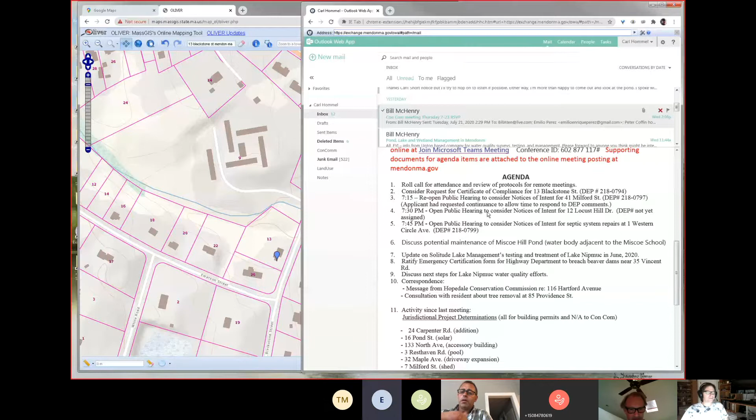7:15. Bill, you ready? So this is the one where Bob Poxon was trying to get his applicants to comment on his revisions, and they still haven't given him an approval. So he's asking to continue.

Let's have somebody make a motion to continue to the next posted meeting. Carl Hummel moves. Is there a second? Peter Coffin seconds. All in favor? Aye, aye, aye.

All right, okay. Now we got some time before our 7:30, so if you want to run down any discussion items. Discuss potential maintenance of Miscoe Hill Pond water body adjacent to the Miscoe School.

Peter, you want to go, Carl, you want to step in? Yes, I'm sharing on the screen the body of water in question. I am a part owner of this pond, so when we come to any decisions about making spending decisions, I would step down and recuse myself from that.

There have been some anonymous complaints over the past month about the water level and the construction work being done on the lake. I have reached out to Solitude Lake Management and also the company in Upton that does water management for estimates about coming out and doing a survey and checking for invasive species, whether the beavers are being too destructive, and any other recommendations they might have as to water quality.

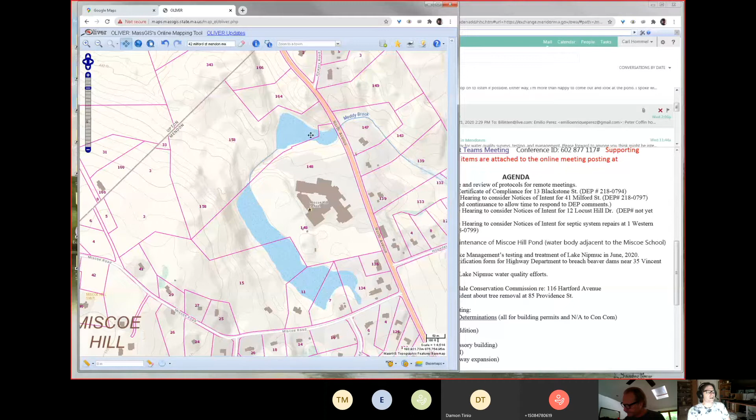I'm blanking on his name. I'll come back to it. John Gannett - the Gannets, right? And they might be interested because any work done on the lake would impact the creek and then the outflow to the second lake that is down below them.

So I would be working with Bill and coming up with an official Conservation Commission letter that would go to all of the interested parties, and then host an evaluation meeting to say whether people want to address invasive species, do mechanical removal like in the pond, or pursue water treatment.

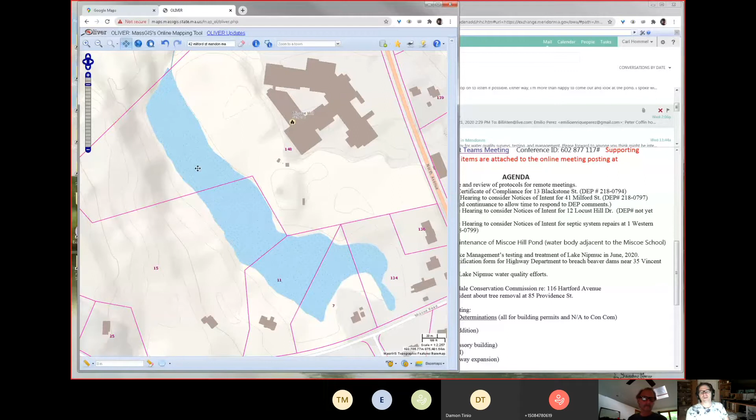One of the concerns that the person at the Upton Company raised is that the football field is right here, and there may be fertilizer and other runoff coming from that which would lead to water quality issues. So they are sensitive to those concerns.

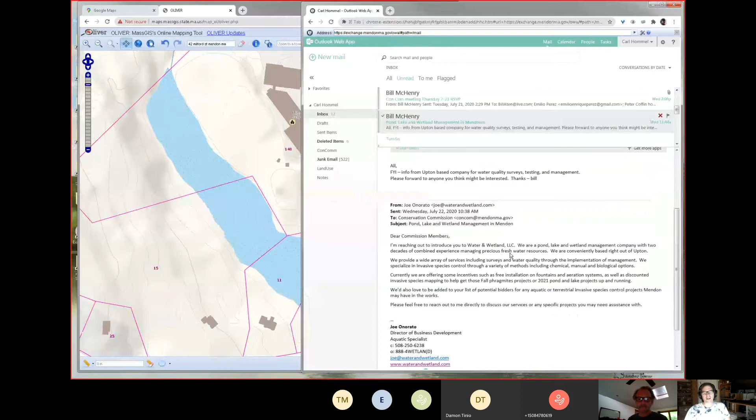They're also interested - they sent a letter to the Conservation Commission earlier this week about water and wetlands, and I'm quite sure they'd be interested in working with me and the committee on this particular plan so they can be considered for any future work on Lake Nipmuc and other lakes the Conservation Commission is responsible for in town. So what I would ask for, after discussion, is a motion to authorize Bill and me to move forward and engage in a free survey, then talk with them and with Solitude about whether we do water quality testing.

Any questions, Damon, Emilio, Peter? I think that sounds great. I'm very... that would be... to get some free advice, I think is huge.

Free is good. And the other thing is then I can go back to Solitude and say, I already had this other company come out. Do you want to lower your price from 750 to something more reasonable, and see whether they're interested in engaging with us on this. Competition is a good thing.

Carl, great job pulling it together. I'll make a motion to pursue steps towards a management plan for the pond in question. Okay, I'll second that. Can you second that, Carl, or you're...

I'm only going to recuse myself when there's money involved. I don't know if that's a... Okay, well, we'll go with that. Would you like me to second it? Okay, I'll stay out of it then. Let me have somebody else just to keep it all clean. You do own property on it. That's probably the best. So Emilio is second. Emilio Perez will second.

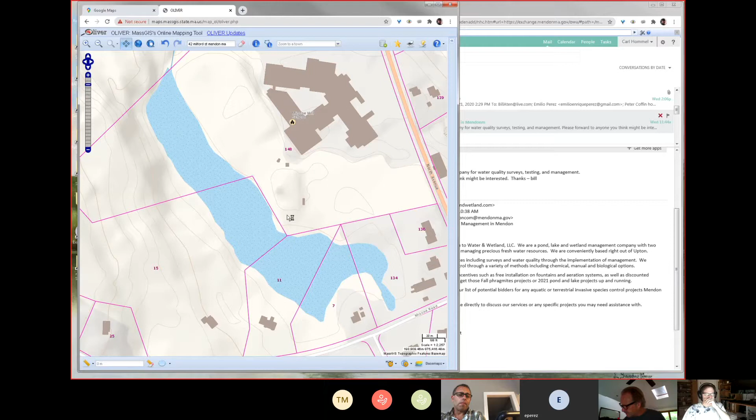I'll give you one quick one while you're looking. Can we just get an okay for the Grandview Entertainment license routing slip? Yeah, I have no issues there as far as anything going on with that. Okay, everybody else okay with that?

Which agenda item is that? It's not, it just came in, the routing slip just came across. Okay, I have no problem with it. It looks like they're asking for permission for a big tent, and I would think they would need outdoor space, with COVID-19 for sure. Okay, great, no objections. So, sign that bill and you can get it off to them.

So, update on Solitude Lake Management's testing and treatment of Lake Nipmuc in June. I think I can't remember where we left this, but I think everybody knows now. They came in, they did the copper sulfate treatment for the algae and some of the more routine treatment that they've done. And they're going to come back after they've done some lab tests and see if the algae springs back or whether this was effective enough for a while.

I've been on the lake quite a bit the last couple of weeks, and it has seemed to help tremendously. Oh, good. Everybody that lives on the lake has agreed, and you can actually see some of the stuff that was growing rapidly in the spring is already dying off. So I think we're in good shape on that end of it. Thank you, but yeah, obviously we'd like to hear from Solitude on their expertise about it.

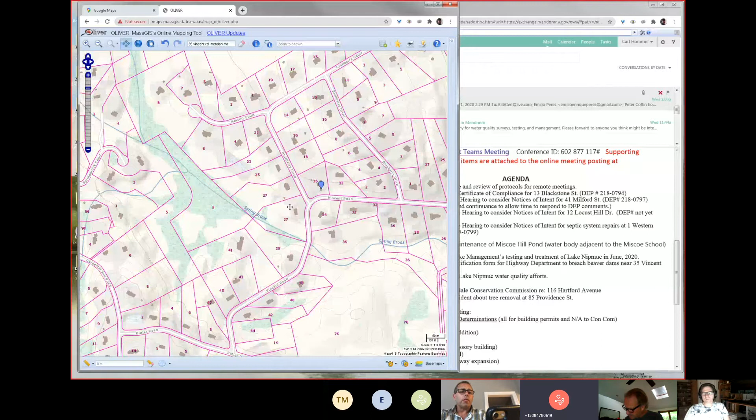Okay, next steps for Lake Nipmuc water quality efforts, Bill? That's just ongoing, leaving it on the agenda. At some point, if we could... actually, this new company might be able to give us a little help there too.

Go ahead, Carl. We just heard the copper sulfate treatments were having a positive effect on the look of the lake. Is there a water quality problem? Well, we still don't know why there's a spike in E. coli at certain test locations, like right near the beach, not in front of the beach, and right near the yacht club, but not everywhere else.

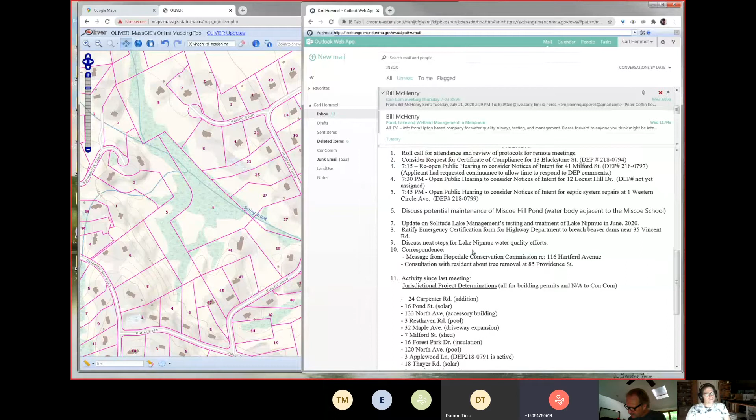Has that been happening this year, or was that just last year? I don't know because I haven't heard of any testing. I do believe that Susan Thomas has done some testing for the Nipmuc Association, and it's coming back to me, I think you're right, one event it was higher in a place she wasn't assuming it. So there's been some, but that's a non-certified lab, and the Board of Health will not entertain that information. I think it's useful as a screening, but the Board of Health only tests at the beach.

So maybe if there's an issue, someone's got to pay for a certified lab to do the testing just anywhere else other than the beach. I think the Board of Health ran some tests at several locations, but I can't remember exactly where they do it. But it's not just in front of the beach.

No, they do some over in the cove, like where the outlet is, by Nipmuc Marine, they check the outlet flow there that comes out of the catch basins on 16. And they have done some down in the other cove past Alicante in the past. But the water level on the lake is high right now, even though we're in somewhat of a drought situation. It seems the water level is holding pretty well, whether it's beaver dams on the outlet, I'm not sure, but at this point the beaver dams could be helping the lake rather than hurting it right now.

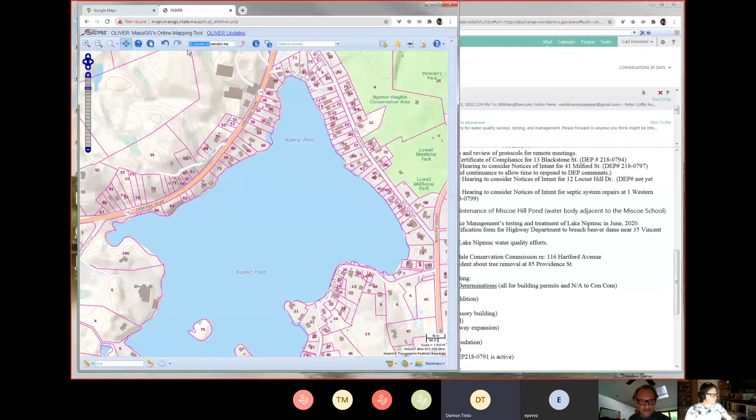All right, we got 7:30 here. We want to move to our first hearing. So we can open the public hearing to consider notice of intent for 12 Locust Hill Drive, DEP number not yet assigned.

Fred, is that yours? So yeah, Fred is here to present that one. If we finish up tonight, Fred, we'll just have to wait for the file number. But anyway, go ahead, I think the floor is yours. Okay.

You need your plans? You got a plan for this, Fred? Yeah, it should be accessible to you, Bill, right? Yeah, either Carl or I will. Here, Carl's on it, I think. It's also on the PDF that was sent out on the email. That's correct, the notice of intent, that's what I'm opening up. Yep, thank you, Carl.

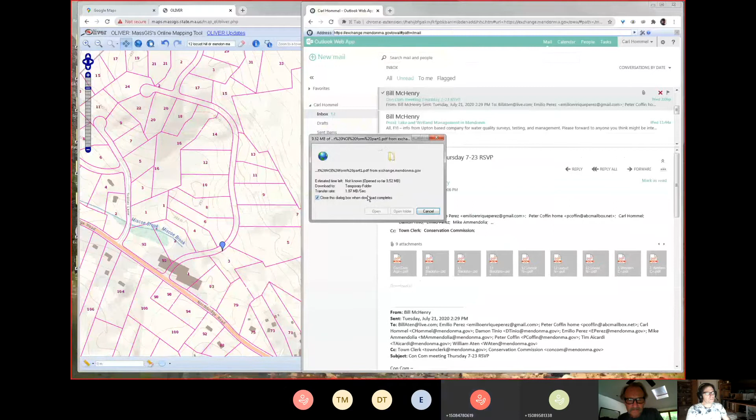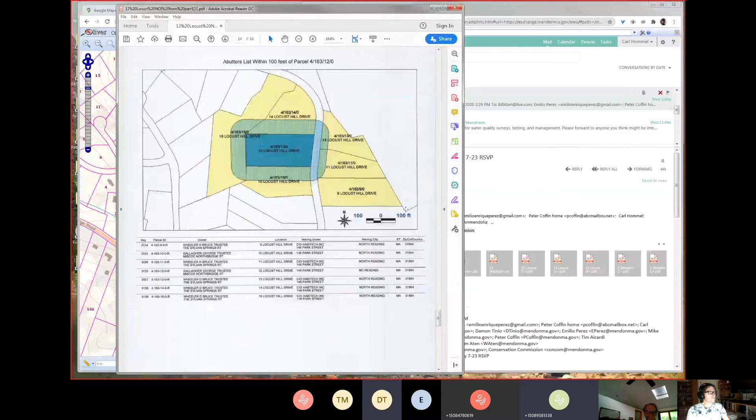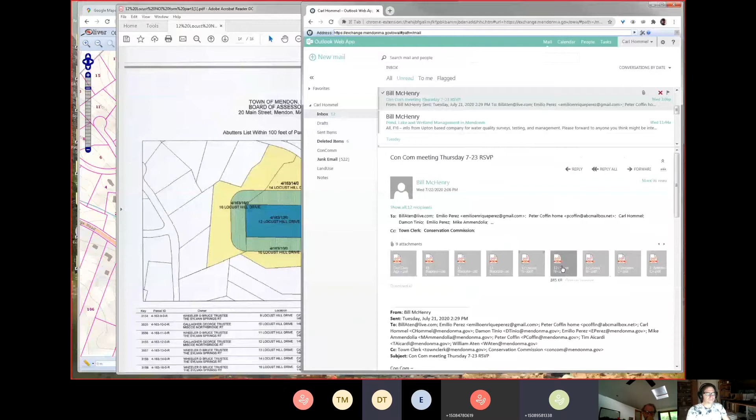Okay, Sheet 1 of that plan is where will be the most helpful. Sheet 1 shows the entire lot. This is a new construction request that we're making. It's a lot that has a lot going on. It's wrapped with drainage facilities for the subdivision. And we have here about a third of the lot, going back about a third from Locust Hill Drive, is where this notice of intent would apply. The rest is under a separate notice, separate order of conditions for the infrastructure for Miscoe Springs development.

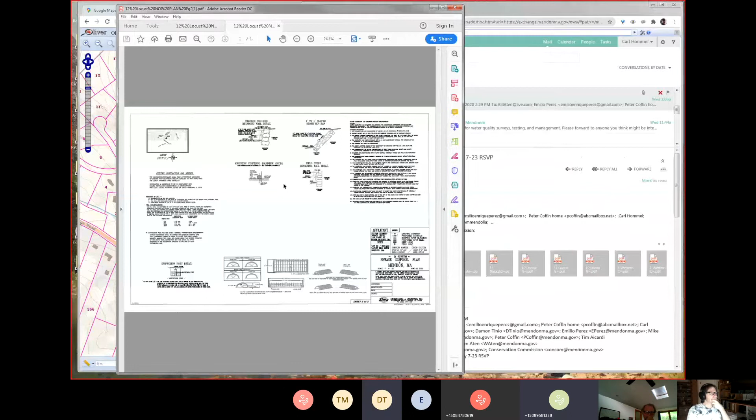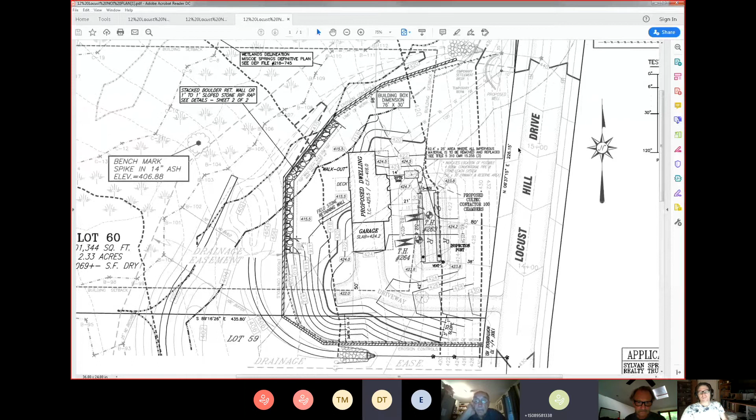So we have about a third of the lot here that's a hillside lot. What you're looking at is Locust Hill Drive, elevated quite a bit above the wetland that goes through the middle of the lot. And prior to that wetland, we have water quality swales, a sediment forebay, and the detention basin that serves most of this section of the development.

So the work area, you can see it's like a horseshoe shape where the house is located, the driveway, the septic, the well, and everything else is pretty much soft grading except for a boulder retaining wall right behind the house. We have about 110 feet or so of retaining wall that will allow this house to have a modest backyard. It's about 50 feet from the house to that wall.

So there's two lines of defense here for the wetlands. One is the infrastructure that is in place, that would be the water quality swales outside of this activity that we're getting permitted tonight. Those swales and detention basins are constructed and operating. On the uphill side of that infrastructure, we're going to wrap this building site with erosion controls in the form of straw wattles and siltation fence. And the permanent erosion control certainly would be the boulder retaining wall behind the house. Everything else is soft grading and would be handled by vegetative cover.

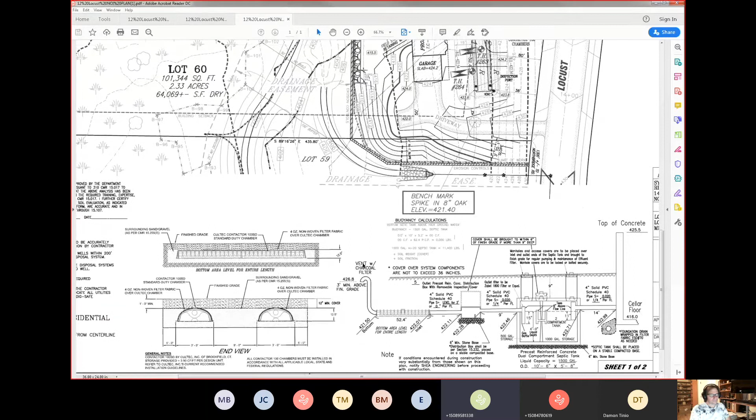Yes, and this will have to be hands-on as far as getting that grass established, or whatever shrubbery they want to put in there. But there is great protection of the wetland in the form of, when you get beyond this slope, there's a water quality swale. You can see the curvilinear shape coming over into a forebay. That is protection for the wetlands, and then you have the detention basin itself. So we have the swale, the forebay, and detention basin, and then the water goes into the wetlands. So whatever happens here, if there are deposits that make their way to the bottom of the slope, there'll be ample opportunity to clean that up and get it out of the drainage easement.

So, Peter, is there something you want to have written up differently in the order of conditions for this lot? I guess if Fred's okay with it, or the client, I would recommend drought-resistant grass and a higher quality seed, and maybe planting of perennials to reinforce that bank would be a good idea.

You mean something other than grasses? Something other than builder's rye? Yeah. Oh yes, yes. You could put a wildflower seed mix in there, but drought resistant is what that slope really needs. No, I'm looking for dense, thick growth. The owner might think otherwise, so I'm not here to tell you aesthetically what to do, but I would want a higher grade level for the planting plan.

So what could you recommend? Is there a way of saying what sort of seed, or was my language sufficient? Fred? Well, I wouldn't go any further than just making sure we get the drought resistant grasses. Yeah, and it's really going to be how well it takes. So it needs watering for sure. This is going to be an area where there's going to be some man hours put in here to keep that slope in place until the vegetation is established.

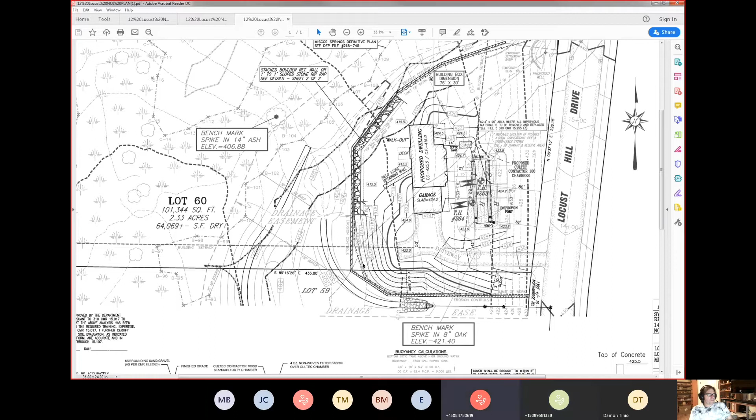I got a question for you, Fred. This whole lot, this one-third to the front, it's all going to get cleared out totally. So tell me, where are you going to put the loam that you're scraping off? It seems to me the only spot not getting altered is near the building box dimension and the 420 - everything else is going to be worked on. So how are you going to work at that?

Oh yes, a subdivision like this is staged throughout at different locations. They'll have a staging area for loam production. This will be stripped and stockpiled. There are staging areas for rock preparation and for different products that the contractor makes.

And they've done a good job throughout this subdivision so far of making sure these staging operations take care of the water. You guys have heard of Gentis Corporation, I'm sure. They're very good at handling the runoff from a site that's opened up and under construction, and it's been a pleasure working with them because they really do pay attention to what's happening.

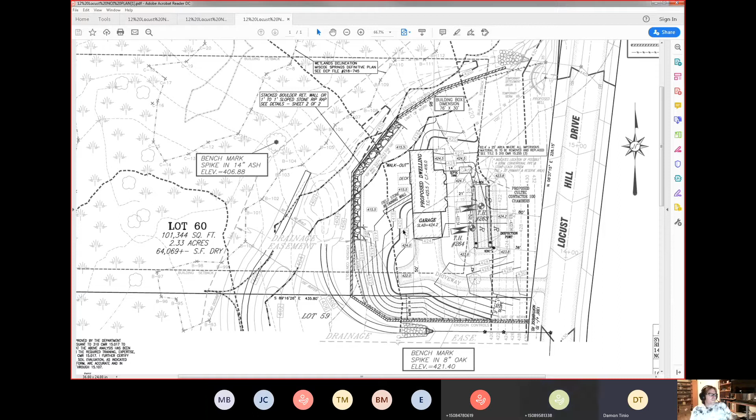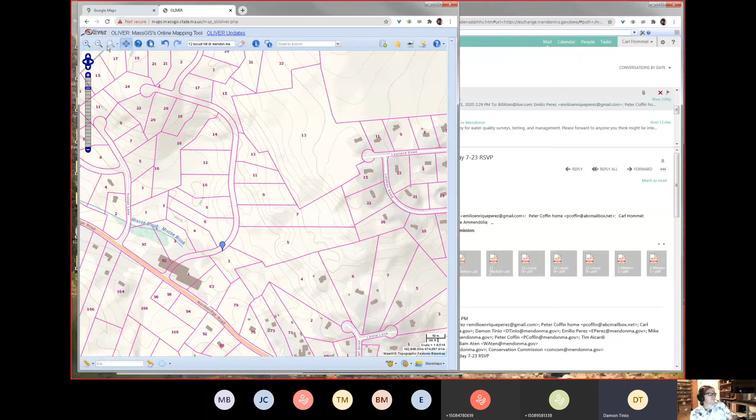Obviously we worry about it when heavy rain comes, but having them there on that project, with this type of challenging lot, I'd rather see them there than some other people we've dealt with over the years.

Oh yeah, no, they've got methods all over the place. Wherever they're working, they stay ahead of the water. It's not that nothing ever happens or they don't have a situation to respond to, but they think ahead - they stay a few steps ahead of heavy rain whenever they open up an area. Very impressed with the attention they apply to their work site.

Is this the one that DeSheng does the construction supervision, or is that all history now? No, DeSheng is still on this job, yeah. Okay, good - he makes his inspections and reports on a regular basis.

Haven't seen an email from him lately.

Well listen guys, we're working on this particular lot, and we'll get a hearing for this. It's now 7:53, and we missed the 7:45 public hearing. So is there any other questions on this one?

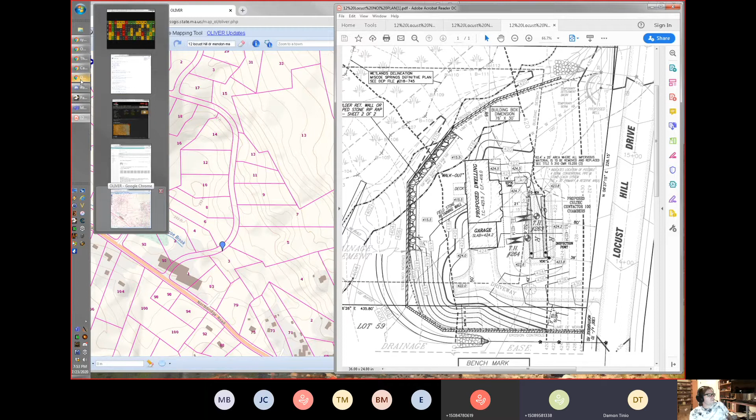I'll make a motion to approve, I guess. Carl Hummel seconds. You'll get this all done when we get a DEP number, obviously - contingent on the DEP number.

Is there - all in favor? Aye. Aye.

All right, thank you. Western Circle Ave, is that you too, Fred? Thank you. No, I'm not on that one.

All right, thank you. So if I can say - I can see Mr. Carpenter, who's a resident, is with us, but Mr. Carpenter, we have to go to a public hearing that's scheduled for 7:45, so if you can bear with us, please. Okay, and thank you. And Margaret, is this one yours?

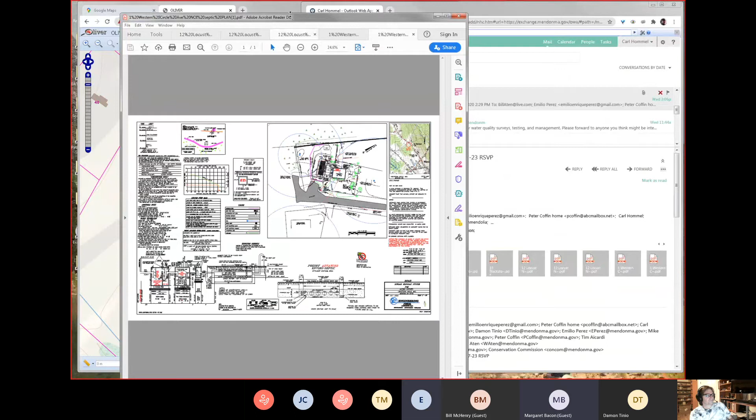We have the plan on the screen, Margaret. Okay, so basically it's an existing 3-bedroom house with a failed system. The existing system is on the right side of the house, but due to wells, I had to put the system on the other side in order to fit it.

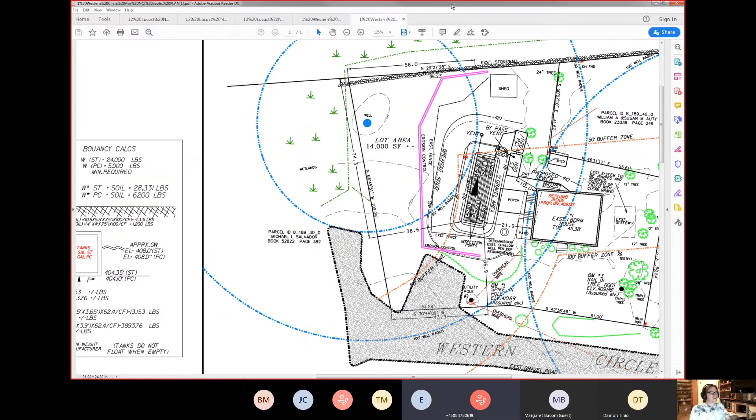I don't have any further questions. Any other questions? No. Motion? I'll make a motion to accept the proposed repair for Western Circle. Second, Carl Hummel seconds. All in favor? Aye. Aye. Thank you. That was pleasantly short.

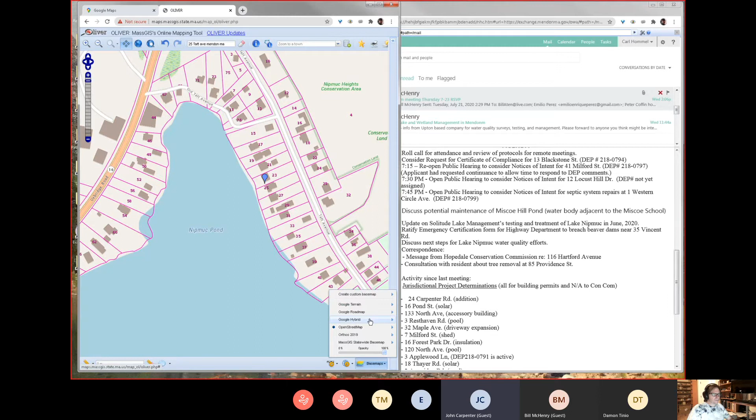Okay, I thought you were looking to remove trees, but you're not, you're just looking to trim them. Just trimming them, I don't want to remove them. All right, which house is yours? Right next to former Chief Larson's house.

Oh, okay, so Bouchard's old house? Right, not a problem with trimming. Thank you for coming in and showing your concern. As long as you're not doing any digging of the shoreline or stumping, you can definitely maintain a safe environment around your property. Okay, just wanted to make sure. Thank you very much.

Sorry about that, I thought that was a little bit more involved. The original question seemed to be quite a bit more involved. Okay, great, all right, so.

This is from Hopedale Conservation Commission regarding 116 Hartford Ave. Do you remember that situation there? I think you were in touch with them afterwards, Damon. Just basically to say we're glad to hear about it and keep us apprised as to any activity there. Oh yes, I emailed Vanessa, the conservation lady. Yes, I did get in contact with her.

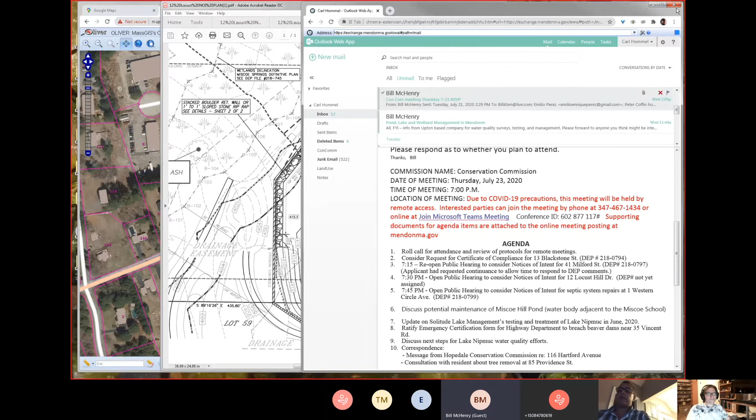Thanks for your help there, Carl. Yep, I will call you next Tuesday afternoon or send an email about a more formal engagement letter with the people in Upton. Just so you know, I will most likely be completely away from internet access, but we can talk. Okay, when are you going to be back? All of this coming week, but I can jump on it as soon as I get back.

Okay, great, well since they're willing to do it for free, we can tidy up the paperwork on the Conservation Commission letterhead afterwards. Right, and it's perfect that this guy is coming at us from Upton because we might be able to get quite a bit out of him. I mean, it would be good business for him to compete with Solitude on Lake Nipmuc. Yes, I spoke with one of the two owners, co-owners. It looks like two couples. He said he went to Nipmuc High School, so he's familiar with the area, and yeah, they're local.

Is this a new startup? I don't know how new it is. He did say that the two of them used to work for Solitude and decided to go into business for themselves. Wow, very good. I see nothing wrong in entertaining offers to work from this new place, and having them start out small on this pond is a great way for them to demonstrate their reliability, and then we ask them to engage in a request for quotes on the next Lake Nipmuc round of treatments. Well, it would only be proper to put that business out to bid periodically anyway. Well, now that we have an alternative, I mean, Solitude Lake owns the entire eastern seaboard.